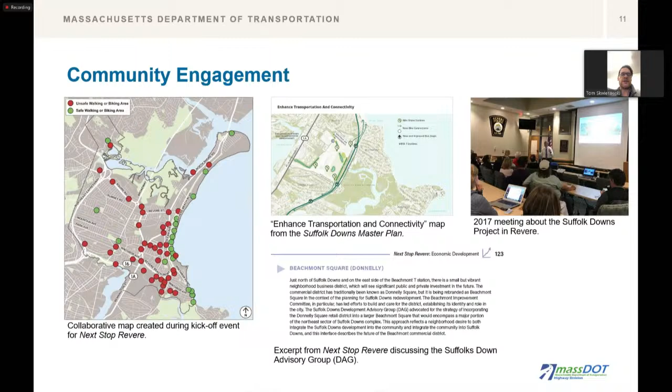There's going to be a series of improvement projects along Winthrop Avenue and even sooner along Donnelly Square. And so this project is a great connection both to that, but also to the proposed MassDOT Bennington Street project, to the host of investments that DCR has made and will be making on Ocean Avenue and Revere Beach Boulevard in the near future. And really all of this will start to connect into a broader network.

And I've heard a lot from residents in the city when we talk about a bike lane being built or a new shared use path being built, and concerns of a bike lane going to nowhere, right? And I think we hear those concerns loud and clear. And I think what we need to do is build a strong network where folks from the western portion of the city can connect to the beach and vice versa.

And I think this is a great opportunity to do just that, and connect with our planning efforts, build into a broader network, and ultimately create safer alternatives to driving for folks from this new development and from folks in Beachmont and other parts of the city to enjoy everything that Suffolk Downs will have to offer. So we're really excited about this project, happy to support this and be part of the team, and look forward to answering your questions later on. But I'll pass it on back to Annie now.

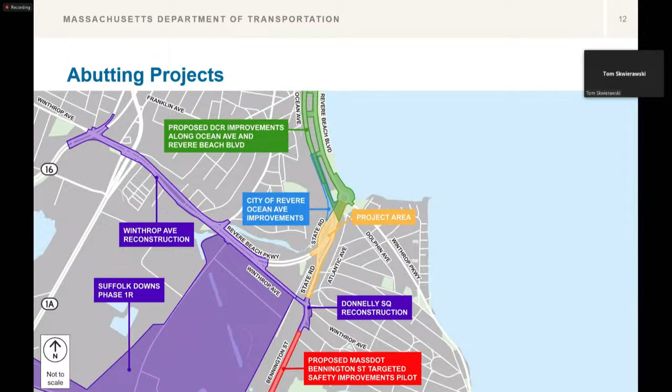Thank you, Tom. So now let's look at the overall project area shown on the slide in the orange shaded area. The project study area includes State Road between the intersection of Donnelly Square, north of the intersections of Winthrop Ave, Bennington Street, State Road, Unity Ave, and the Beachmont MBTA station, up to, but not including, Eliot Circle. The connector project includes intersections where State Road merges onto Revere Beach Parkway and Ocean Avenue, as well as Revere Beach Parkway from west of the Rita Singer Bridge up to Eliot Circle. I will now pass the presentation to Valchia, who will talk about the existing conditions.

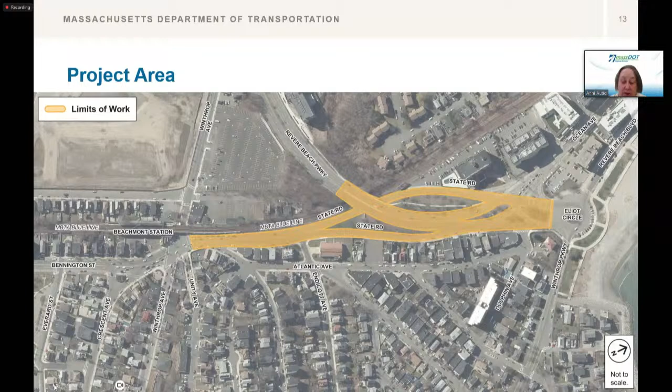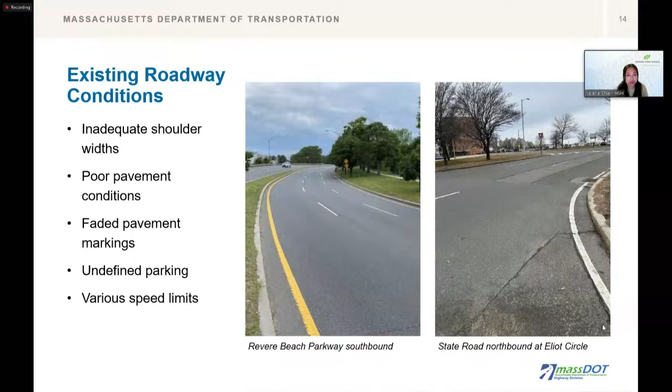Revere Beach Parkway is generally 3 lanes in each direction with a median separation from Winthrop Ave to Ocean Avenue. It similarly has inadequate shoulder widths, but parking is not permitted on either side of the roadway. And then just continuing on to existing conditions, on-street parking and the existing geometry of the roadway can cause poor visibility for vehicles looking to exit onto State Road, northbound from the neighborhood streets. There are also intersections within the project area that are wide and have insufficient signage, making them difficult for pedestrians to be seen as they cross the street.

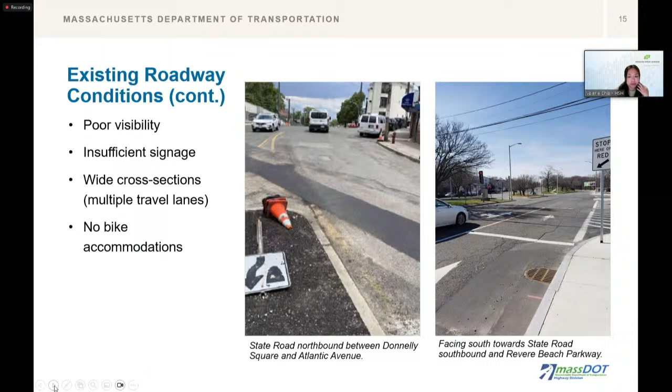Limited bicycle facilities exist within the project limits, and that creates a gap within the Beachmont connector. So since there are no dedicated bicycle facilities and the on-street parking takes place over shoulders, cyclists that are traveling through this area need to share the road with vehicles. For existing sidewalk conditions, like cyclists, the existing conditions for pedestrians on State Road have a gap in the network just due to the insufficient sidewalk that's out there.

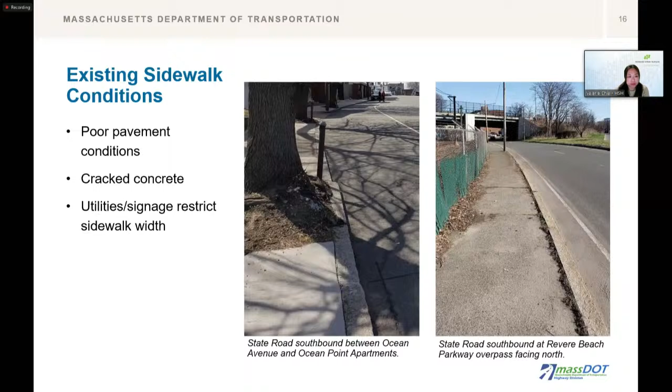Pedestrians currently use sidewalks that are in fair to poor conditions, meaning the concrete or asphalt is cracked and uneven. Sometimes the sidewalk is uprooted by surrounding trees, or in some sections, the sidewalk is too narrow. The pedestrian path along the northbound lanes of State Road lacks ADA compliant ramps at Atlantic Avenue and Eliot Circle. On Revere Beach Parkway, pedestrian accommodations are limited to one side of the roadway, and they also lack ADA compliant curb ramps at crosswalks and intersections.

And then at Ocean Ave, which has been recently reconstructed near the intersection where State Road, Revere Beach Parkway, and Ocean Ave intersect. Upgrades along Ocean Ave include narrowed lane widths, wide pedestrian sidewalks with benches, and separate bike lanes on each side of the roadway. Suffolk Downs is proposing similar bike and ped improvements to the southern end of the project limits when that will be constructed. With that, I will pass it back to Annie to talk about project goals.

Thank you, Val. So what do we want to accomplish? The primary goals of this project are to provide a safe path for cyclists and to improve vehicular safety within the project limits along State Road.

Annie, you back? I'm back. Okay. Did you lose? Can you go back 2 slides? Back. Back. Oh, no, stay right there.

This condition does not meet the requirements of MassDOT's engineering directive, which states that a separated bicycle facility should be provided for this road due to vehicular volumes greater than 10,000 vehicles per day, multiple lanes of vehicular travel in one direction, and the classification is a corridor with high potential for everyday biking.

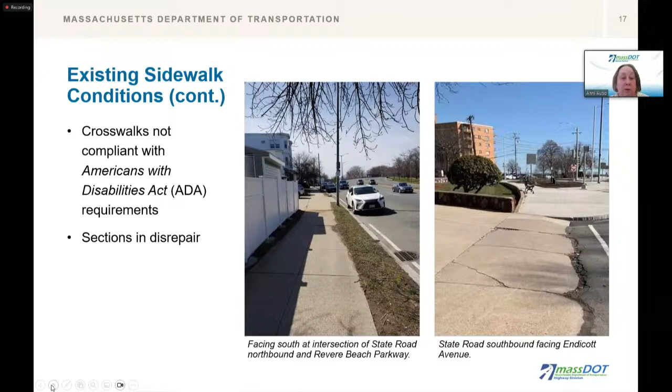So how did we get here? Advance. Perfect. In September 2021, MassDOT recognized the need to develop a connector project to join infrastructure projects happening within and at both ends of this project's limits. In January 2022, Howard Stein Hudson was contracted to perform traffic counts, complete an alternatives analysis, develop a conceptual design, and hold lots of meetings with constituent groups as part of developing the Beachmont connector design.

Between May and November 2023, project development included advancing the conceptual design to 25%, utility coordination discussions, meeting with the tree warden, conducting site walks to address design specifics such as roadway signage and their ownership, maintaining coordination with DCR. MassDOT then received the 25% highway design submittal. The package was distributed and reviewed by the City of Revere, DCR, MBTA.

In June 2024, MassDOT approved Howard Stein Hudson's preliminary design and right-of-way plans. More meetings were then scheduled with the City of Revere in an effort to bring us all together this evening. I will now turn the presentation back over to Val Chia from Howard Stein Hudson, who will provide an overview of the design.

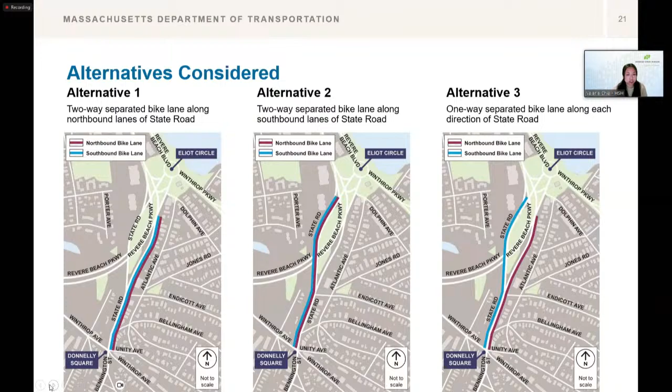As a result of that study, the two-way separated bike lane along the southbound lanes of State Road was chosen as the preferred alternative, since it had the fewest associated challenges and provided the greatest safety benefit by providing a direct route between Revere Beach and Beachmont Station. These alternatives led to our proposed design. So for the next several slides, I'm going to be providing an overview of the design and then describe more in detail the proposed improvements to address the existing conditions that I mentioned earlier.

So as you can see, major changes that are going to be included as part of this project is a road diet to allocate one of the 2 travel lanes in each direction of State Road to provide a 2-way separated bike facility on the southbound side of State Road, and a parking protected single bike lane in the northbound side of State Road, which would ultimately narrow State Road to slow down drivers, give enough space to widen the roadway shoulders, and provide that connection between Beachmont Station and Revere Beach that we had mentioned earlier.

Other improvements as part of this project will include reconstructing the sidewalks and pedestrian ramps, repaving and restriping the road, signal timing updates and signal equipment updates, updated street lighting, preservation of existing trees, and planting opportunities for proposed landscaped areas. Additionally, a shared use path is proposed towards that northern end of the project limits to provide pedestrians and cyclists an east-west connection to access both sides of State Road, as well as the facilities on Ocean Ave. On Revere Beach Parkway, we are proposing pavement markings to reduce the lanes and narrow them as they approach the intersection.

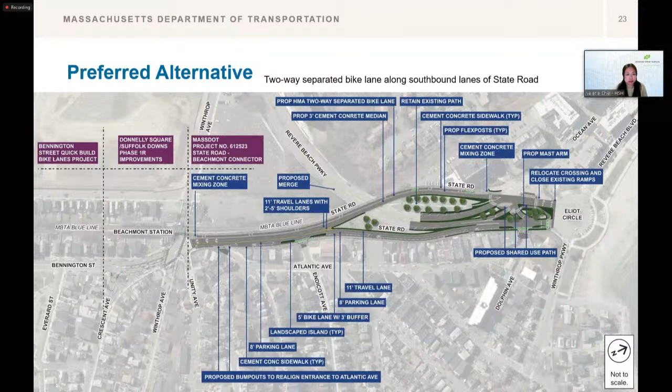Getting into more detail for the roadway improvements. So specific improvements along State Road northbound, so from the left to right direction on the southern part of the plan, include narrowing the roadway from 2 lanes to 1. Parking along the northbound side of State Road will be retained and formalized through pavement markings and signage, and provide protection for the proposed bicycle lane, which would also travel northbound.

At the beginning and ends of the parking lane, where they intersect side streets such as Endicott Ave and Dolphin Ave, landscaped islands will be provided at the corners to allow sufficient sight lines to view oncoming vehicles on State Road from the side streets.

The specific improvements along State Road southbound include maintaining 2 11-foot travel lanes from Donnelly Square as they approach the Rita Singer Bridge to maintain traffic operations, and then narrowing the roadway north of the Rita Singer Bridge from 2 lanes to 1 as it approaches Ocean Ave. Narrowing the cross-section will encourage drivers to operate at lower speeds.

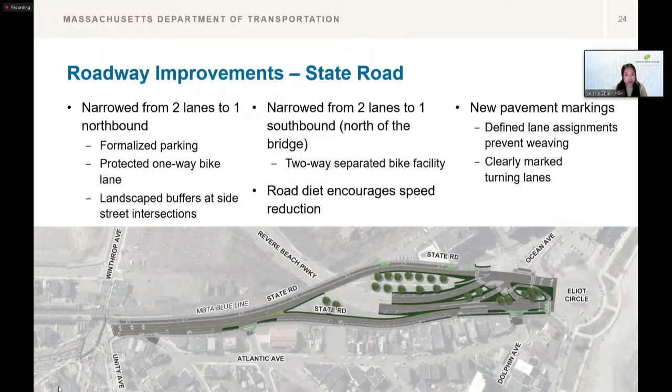In the southbound direction, 2 11-foot travel lanes will be maintained to accommodate queues from the Donnelly Square intersection. Adjacent to the travel lanes will be a 9-foot wide two-way bike path that is separate from the reconstructed sidewalk. This bike path will be at the same grade as the roadway and be separated from the travel lanes by a 3-foot raised concrete buffer with flex posts as well as a 2-foot roadway shoulder.

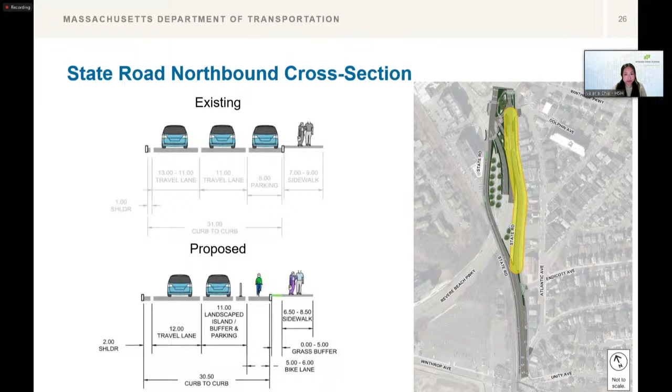And State Road southbound, it'll have similar conditions in that the 2 travel lanes will be reduced to 1 after passing through the Rita Singer Bridge, which spans over Revere Beach Parkway. This section will continue the 2-way separated bike facility until it approaches the intersection of Ocean Ave, Revere Beach Parkway, and State Road. At this intersection, the 2-way separated bike facility ends, and then cyclists can connect to the Ocean Ave bike facilities or enter a shared use path to access the neighborhoods along State Road northbound.

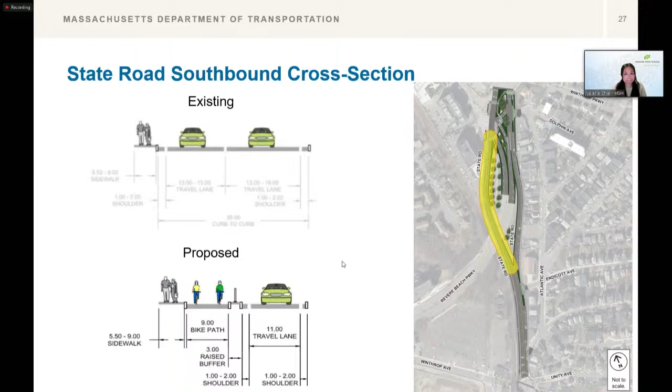So that was State Road. Let's talk about Revere Beach Parkway. So along Revere Beach Parkway, the travel lanes will reduce approaching and departing the State Road and Ocean Ave intersection from 3 lanes to 2 lanes. The reduction in lanes will encourage lower driving speeds as they approach the intersection.

And an extended median will be provided between where Revere Beach Parkway and State Road meet to eliminate vehicle weaving and channel drivers into the correct lane as they either depart to Ocean Ave or continue on to State Road to enter Eliot Circle. As drivers depart Eliot Circle, 2 left turn lanes will be provided to enter Revere Beach Parkway, and 1 through right turn lane will be provided to either enter State Road southbound or turn right onto Ocean Ave. The proposed design of this section of Revere Beach Parkway will provide defined lane assignments to prevent weaving maneuvers and provide clarity for drivers.

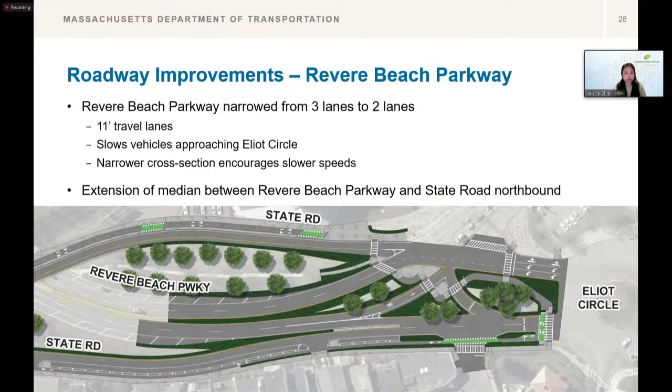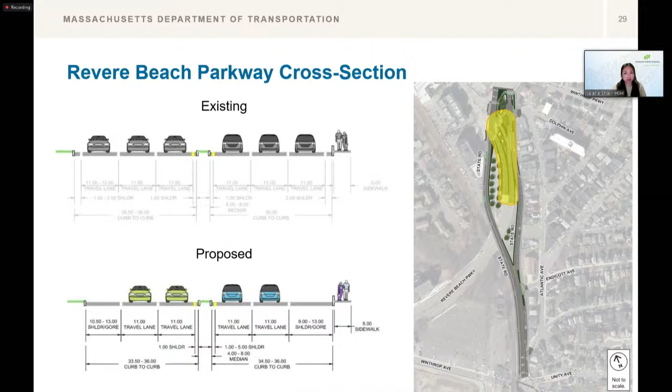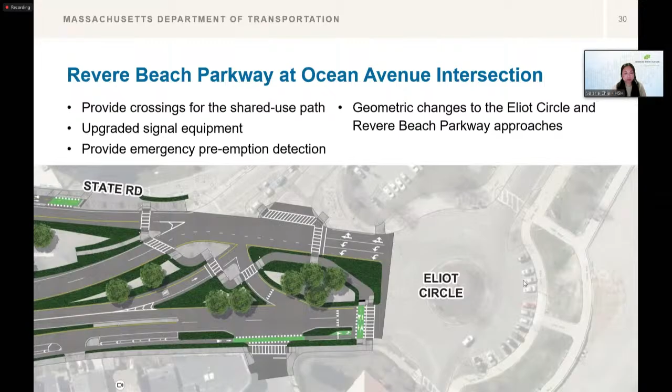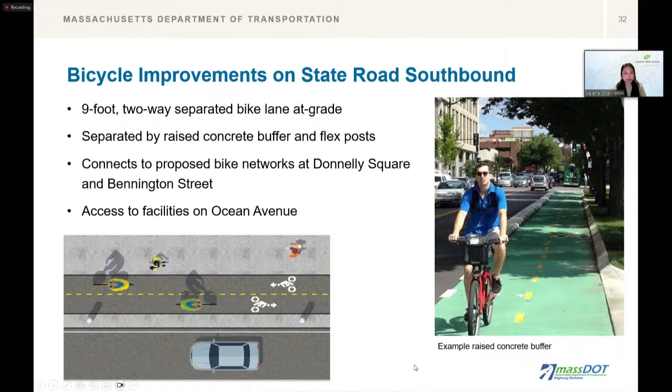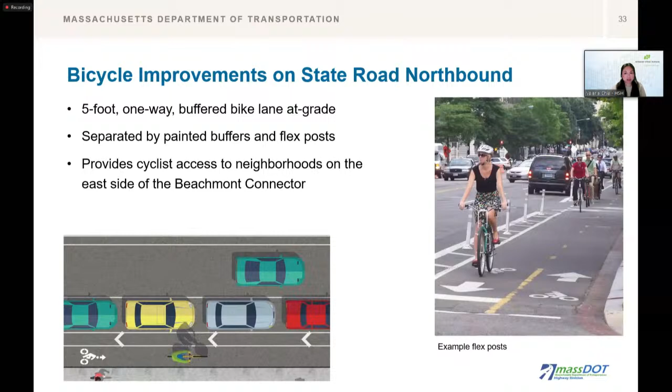Bicyclists traveling northbound on State Road will be provided a 5-foot one-way bicycle lane buffered from the travelway by 8-foot parking and a 3-foot striped buffer, which will also contain flex posts, which you can see in these photos. At side streets such as Endicott Ave and Dolphin Ave, landscape buffer strips will be provided between the one-way bicycle lane and the travel lane to provide a more protected corner and better sight lines as vehicles exit out of the side streets onto State Road or turn into the side streets from State Road. This one-way bicycle lane will allow cyclists access to the neighborhoods on the east side of State Road.

And then to summarize pedestrian improvements, a new 10-foot shared use path will be provided at the State Road, Revere Beach Parkway, and Ocean Ave intersection to connect both cyclists and pedestrians to access both sides of State Road. Both sides of the existing sidewalks along State Road will be reconstructed, where pedestrians will be provided with concrete sidewalks that are at least 5 feet wide and have ADA compliant ramps to meet requirements for accessibility.

I believe now I'm going to pass the mic to Mike Ruderman, who is going to talk to you about right-of-way.

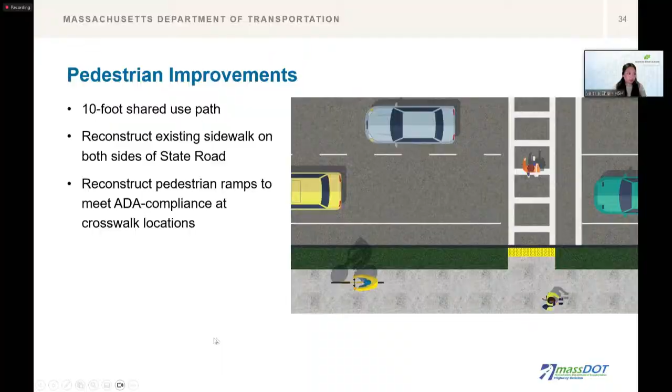Just a moment, I'll get my video going. Sorry, that doesn't seem to be working right now. Oh, you can see me.

Great, thank you. My name is Michael Ruderman. I'm here representing MassDOT's right-of-way section tonight. Right-of-way is the term we use for the area, the land, or the interests in the land that the state has or needs for a project. Where we need additional space to do work, the right-of-way section is charged with acquiring that. Now, that could be a combination of takings in fee, which are full ownership. It could be an easement, a permanent easement, or a temporary easement. Those are all dictated by the project requirements.

Most importantly, if your property is going to be involved in a right-of-way taking, someone will reach out to you individually, whether it's from the MassDOT Right-of-Way Bureau, our consultants, or agents of the city of Revere. If your property is going to be involved in any kind of taking, we will find you and we'll make an appointment with you and we'll explain all of the protections that are afforded to property owners in these circumstances. They come from federal and state laws. In state laws, it's primarily Mass General Laws, Chapter 79. Federal laws, Title III, the Real Property Acts of 1970.

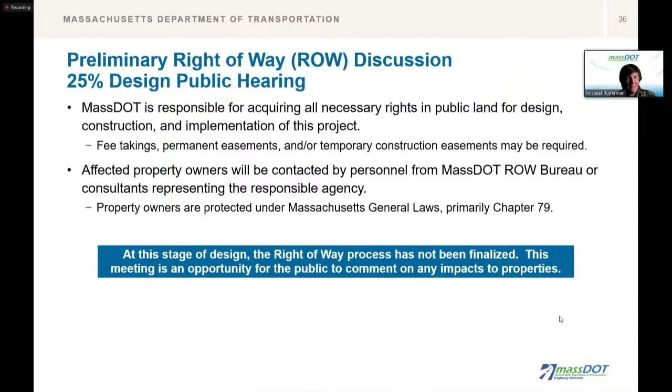Thank you, Mike. So what are the environmental, cultural resource, and community impacts? The project has complied with all environmental reviews and necessary permitting. In particular, trees were highlighted as an important consideration during the preparation of the 25% design plans. On this project, trees fall into the jurisdictions of the City of Revere, MassDOT, and DCR. Thus, tree ownership was carefully reviewed and addressed accordingly.

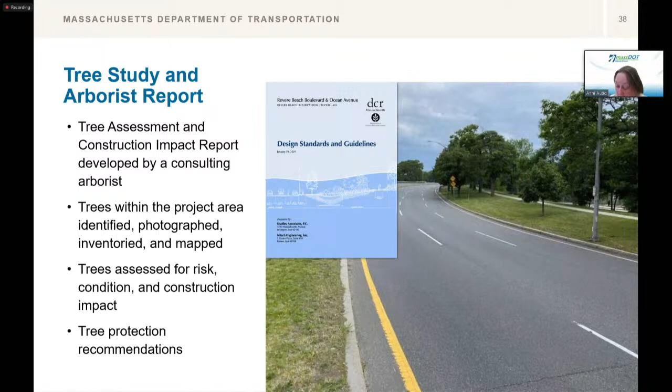For our proposed design, some trees along the corridor will need to be protected and/or trimmed during construction. No trees are scheduled for removal. Work within DCR jurisdiction will require a construction access permit. I will now pass this over to Dan Fleury.

Good evening. My name is Dan Fleury. I'm here to talk to you about some important construction phases for this project. After the completion of the design plans and contract is awarded, the construction of the project will be administered by MassDOT District 4 Construction Division. There will be a MassDOT resident engineer assigned to the project who will be on site during construction activities. All construction operations will be coordinated with the City of Revere.

MassDOT's policy is to minimize traffic impacts during school hours and to make sure that access will be maintained to all abutters throughout construction activities, with short duration closure for driveway construction. Throughout the duration of the project, MassDOT will ensure that pedestrian and cyclist access is maintained. Variable message boards will be used to provide real-time information to drivers about traffic conditions, construction, and other roadway-related information.

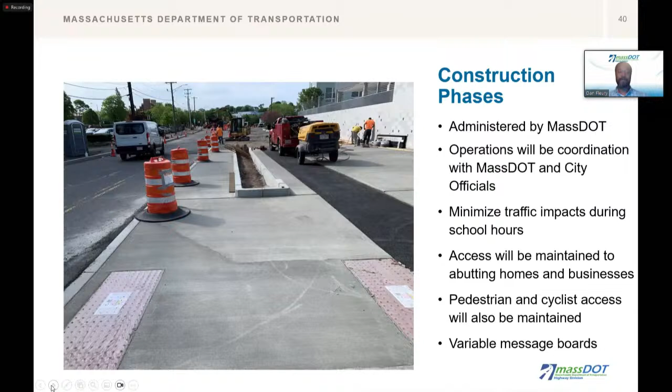Now, let's talk about funding of this project. The project is 100% funded. The federal share is 80% of the cost, while the remaining 20% share will be covered by the state. The estimated construction cost of the project is $7.7 million. The cost does not include any right-of-way acquisition.

Construction funding will be provided through federal funds received from the Congestion Mitigation and Air Quality, known as CMAQ, improvement program. CMAQ is a flexible funding source to state and local government for transportation projects to help meet the requirements of the Clean Air Act. This project is currently programmed for the 2026 Transportation Improvement Program funding year. I will now turn back over to Annie for next steps.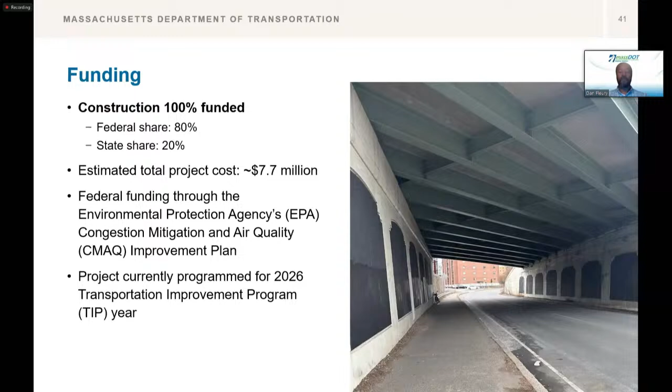So let's talk about next steps. After this design public hearing concludes, there will be an opportunity for the public to provide comments. Once all comments are received, they are reviewed and responses to comments are generated. The design will then be advanced to the next phase, known as 75% design. The 75% design package will be prepared by Howard Stein Hudson and submitted to MassDOT for review and comment, who will also distribute the package to the City of Revere, DCR, and select others.

Comments will be compiled, reviewed, and addressed before the project advances to the 100% design stage. Once again, during this last review process, MassDOT will make comments, compile comments from others, and work with the designer to complete the final package. The final phase of design is known as Plans, Specifications, and Estimate, or PS&E. At this time, the design process is complete and the contractor bid package is prepared.

Right-of-way efforts will proceed concurrently with the development of the 75% and 100% design. After the design is complete and the needed rights-of-way have been secured, the project can be advertised for construction. We anticipate that project advertisement will occur in 2026. Actual construction of the project would occur after project advertisement, bidder selection, and contract award. If advertisement is before June of 2027, construction could start about 6 months later. MassDOT will be administering the construction of the project.

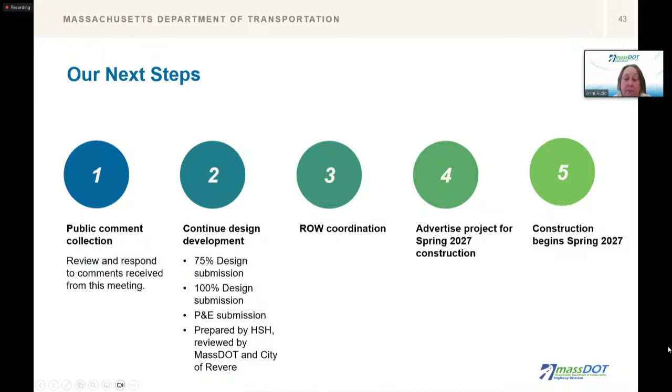Please be sure to include the project number 612523 in the subject line of your email. Your comments will be included in the official hearing transcript and incorporated into the design where feasible. The design public hearing packet with information from tonight's meeting will be made available on MassDOT's website following tonight's meeting. Next slide.

This completes the technical presentation. At this time, I'm going to hand over the presentation to Joe and Miranda, who will provide details on how you can present your questions and comments during this period. But before we open the session up to the public, we want to invite public officials to speak. So if at this time you could raise your hand, our producers can call on you and then unmute your microphone. Please begin by stating your name and your affiliation when we call you.